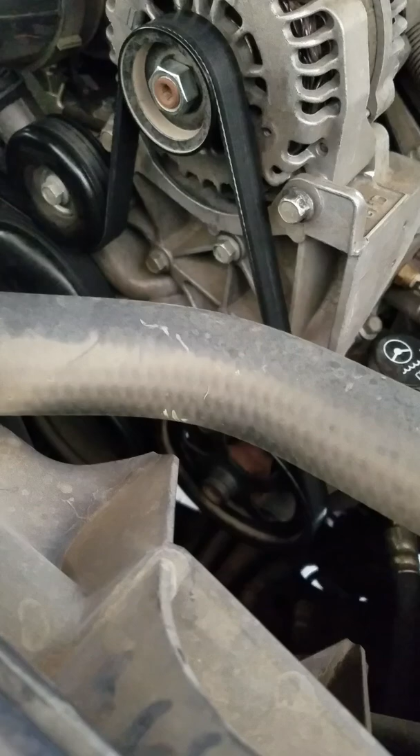Okay, this can be down and dirty here, replacing the belts, and I do mean belts, Serpentine belts on the 2012 Yukon Denali, 2012 Suburban, all the different varieties of the Suburbans, I would call it, the GM cars. You have a Serpentine belt here, but you also have one way down in there.

Let's see if I can get way down in there. And that's your AC unit. You have one single belt for that. And that's a difficult puppy to order, so make sure that you understand. Here's the belt that's already been cut. Let's see if I can get right on the number here. Okay, there's the number.

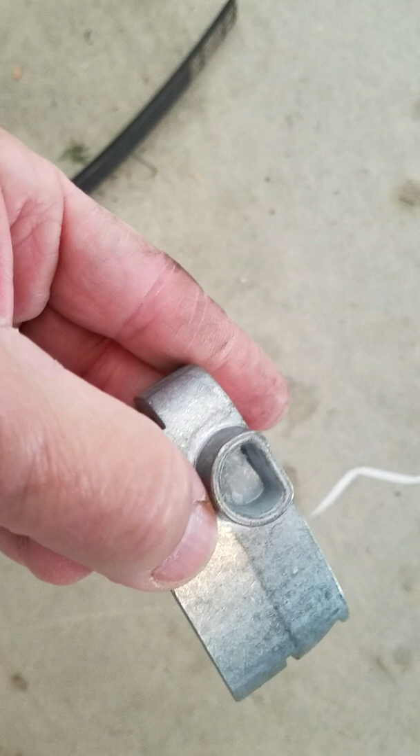Let's get that in there, focus there. There's the number that you're looking for. But the kit comes with this number, so you might want to stop the video right there and say, this is the part I need to order. I got this through Amazon, and it comes with a belt, and it will be this belt with this number and this slip-on bracket. Okay, now to go over this real quickly, because you're going to get instructions with this.

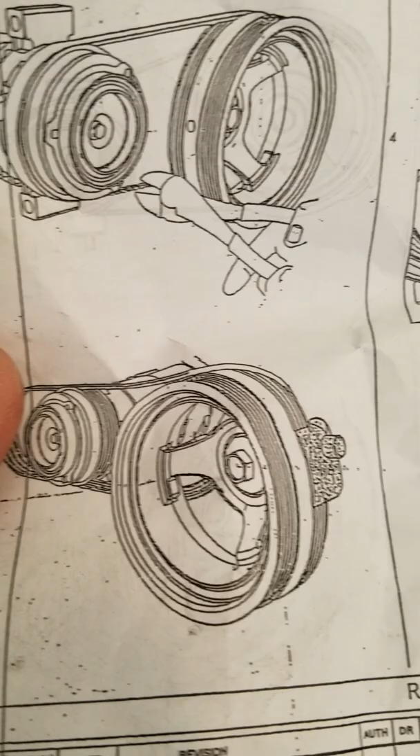All right, if you have a GM car, as you see, I've already snipped the belt. You're going to snip the belt, and then you're going to slip on the other one using this tool. See the tool right there? That tool is this tool right there.

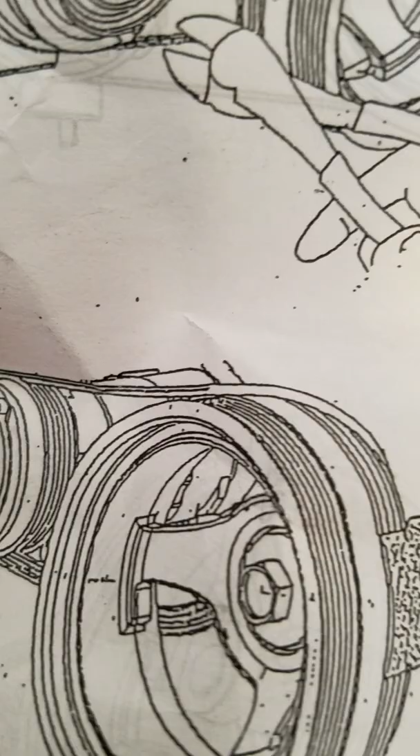Okay, you're basically just going to slide it on there, and you're going to put the belt on first in that fashion, then put this on, and then you're going to basically slide it over the top of that, and then go around in a clockwise motion for these type of vehicles. But the vans go in the opposite direction. Okay, so be aware that the vans go in the opposite direction when installing.

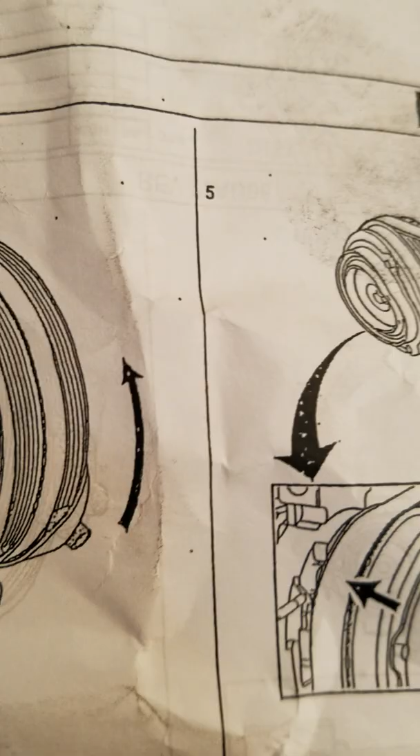Okay, let's see if I have a picture of that somewhere here where it shows the van. Yeah, the van goes in the opposite direction. There it is right there. Goes counterclockwise to turn to put the device on. So just follow the instructions that come with it. But first you need to know that you need to remove this main Serpentine belt first.

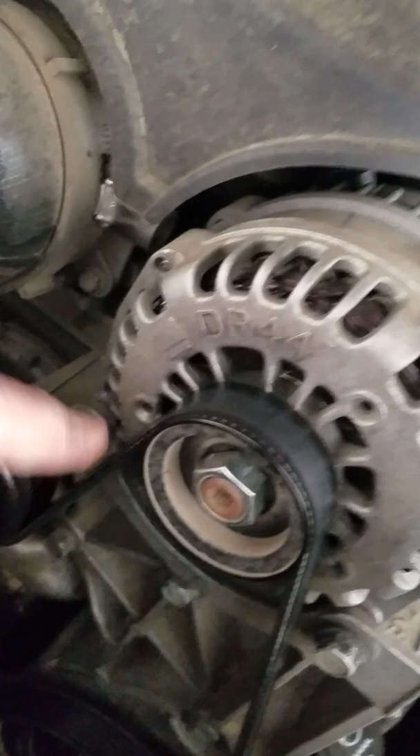There are no instructions, like the old cars, of how to put the belts on. There's nothing on there. Usually you'll see a picture somewhere of how the belts go on. So if you cannot remember, I've done these so many times that I just remember the pattern quite well. They're all pretty much the same in the different models. But if you can't remember, take a picture of it. It'll make it easy. Okay, make sure your pulleys don't squeak.

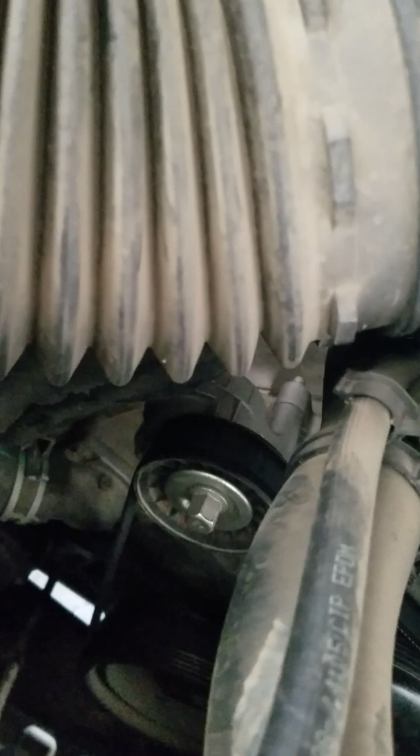This one and this one here. Okay, and also look for the indicator marks. Now these are real tricky. There's one in the middle, okay, but there's one over here on the side where you can't see where my finger is. There's one right there. It's a little sneaky sucker right there. And then there's one over here.

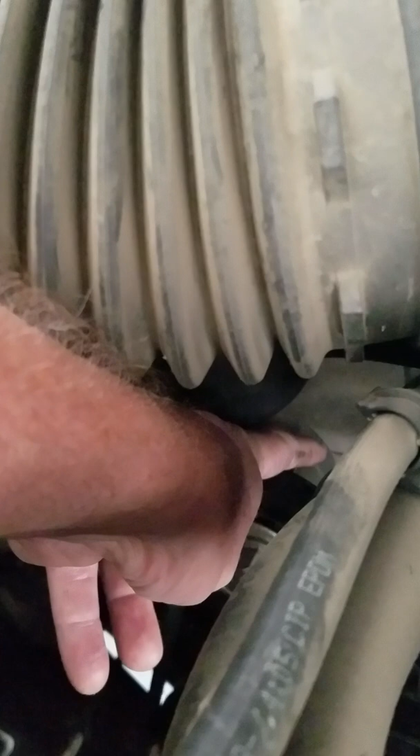This is your tolerance range right here, here and here. This one means things are really going bad. If you've gotten to this mark here, you're in serious trouble, okay? But if you're in between these two marks, you're okay. So that explains those marks there. I found nothing on the internet about these marks that explained it, but there are three. This one looks like it's in the middle, and it's closer to this one, and the one over here is further away.

This one right here, when it gets to this point here, it means it's stretched so far, you're in the danger zone. So once you get to that mark right there, which mine was almost at that mark right here in the middle, it's time to replace, okay? Because it's stretching. Now also you have to worry about cracking, pitting, and all kinds of scarring and stuff, but this is the brand new belt.

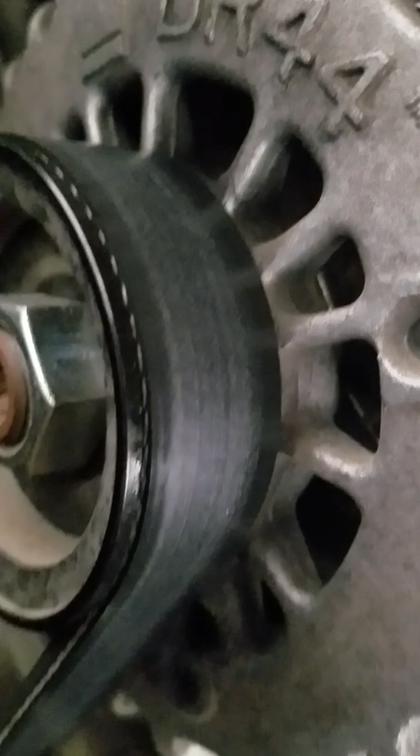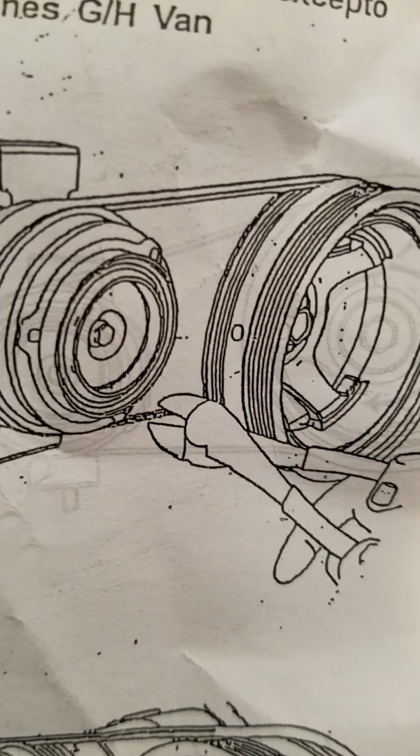I've already installed it, but you got to take this off first, then you will go down there and you will snip, but make sure you have the right parts. You snip that AC belt, which it shows in the picture here, the dreaded snipping. Okay, always fearful when you have to cut a belt, because that means it's non-tightenable and you need a special tool to slip it on.

So once you get those procedures down, you need to know what tools you need to have. Okay, so you need a 15 millimeter socket and a 1/2 inch drive ratchet, and you will attach it to this piece here. Here, let me go from far away to in. Okay, here we go. We're going inside the belt. And it's where you have your marks.

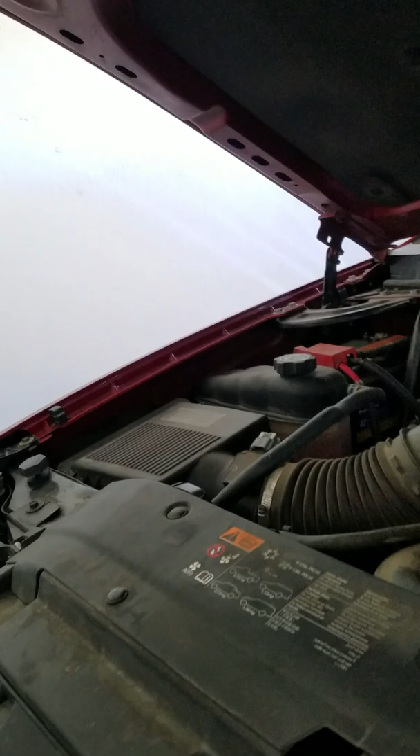Okay, if you can see your marks there, the marks on top that tell you if your belt's good or not. And you will attach it to that, and you will turn it clockwise. And as you turn it clockwise, it will pull it in this direction, loosening this belt, and you will remove the belt. Then you can get to the AC belt. Okay, and reinstalling is the same method. You will put the AC belt on first, then put this Serpentine belt back on.

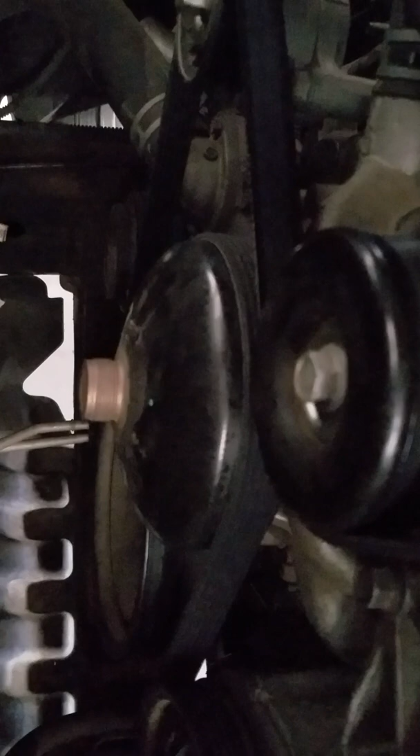Now, to get the AC belt to go on, you'll have to set up everything like it says in the picture, and you'll have to use a 24mm socket that you will attach. Let me go far away so you can see me going in, all right, into the center shaft of the crank inside this pulley here. And you will turn it, rotate it to the right for this type of car, or a van to the left, okay? That's what the instructions say. I'd go to the right, righty-tighty.

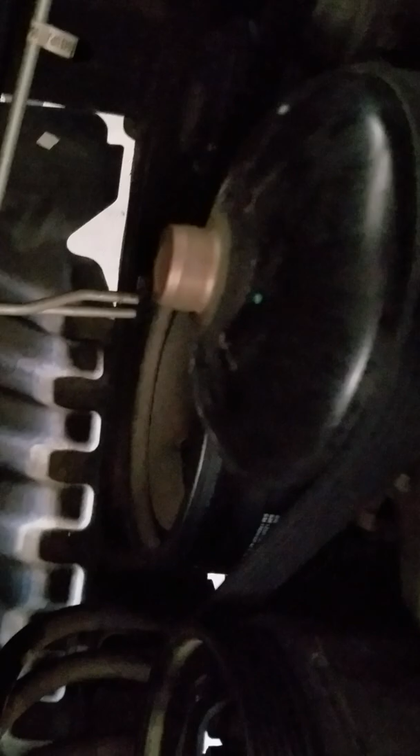And you will keep cranking as the belt slowly slips on there, and it will just basically pop on there. And then you keep turning till this piece falls off. So, I wish I could have shown the instructions, but it was just me and me alone. So I have to show you afterwards. Cut the belt. You're going to put the other belt on like this, and then you're going to drape it over,

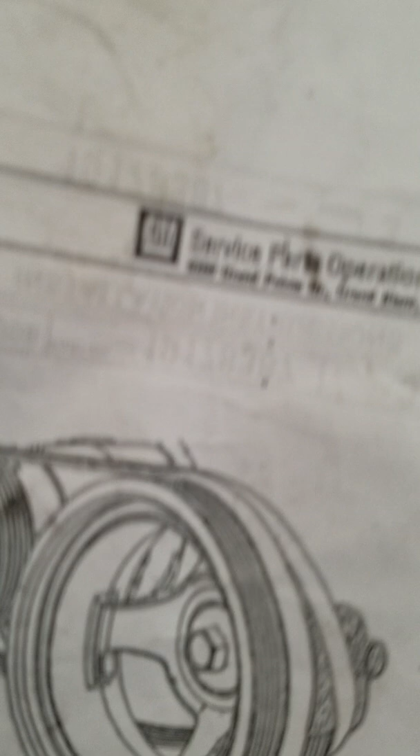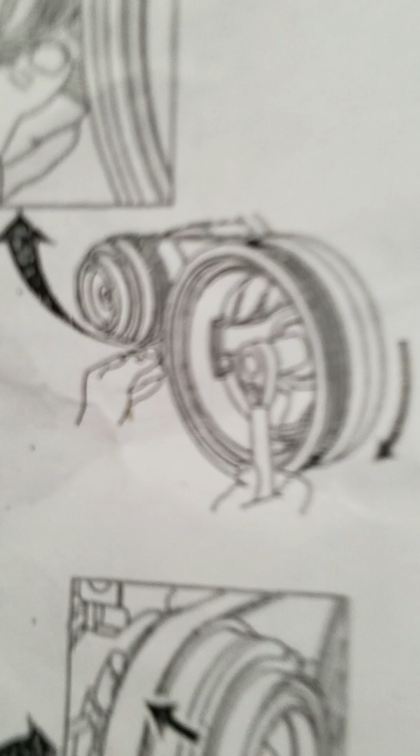and then you're going to turn it, and then you're going to keep turning it. Okay, if you can get that in there, you keep turning it, and make sure all your grooves lined up, and then your little bracket will fall off. And then also check your grooves here when you're reinstalling your Serpentine belt itself. Make sure everything lines up and everything is right on the money there.

Okay, and if you want to do what I do, a little extra lubricant, I use the WD-40, the silicone spray, and I put a little on the belts. You'll see it on one of my videos for quietening or silencing a noisy belt or a little squeaky belt. It works fine. That's what I lubricate these with to keep them nice and fresh. And that is pretty much it.